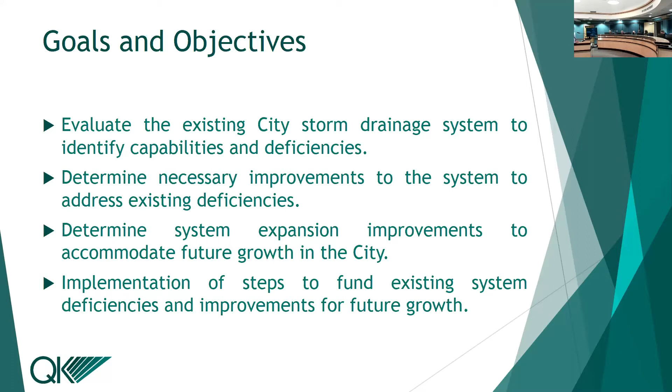Our pipelines are then designed for the intensity of storm: for residential, a 2-year storm at 0.11 inch per hour for catch basins and pipelines, and a 5-year storm for commercial and industrial areas.

The city relies on basins for storage of its stormwater. There are 2 types: retention basins, which just hold the water with no outlet, so it evaporates and percolates into the ground, which is why they're designed for a larger storm to allow for that. The detention basin, predominantly what the city uses, has an outlet designed to be pumped out within a 96-hour period, basically 4 days, pumped out to the Lemoore Canal and various irrigation ditches going through Lemoore.

Those are based on design from the master plan, your stormwater management plan, and also the National Pollutant Discharge Elimination System. That has some requirements that are multifaceted: public education about what not to dump in the storm system, temporary construction measures to reduce erosion, and also design criteria for the basins.

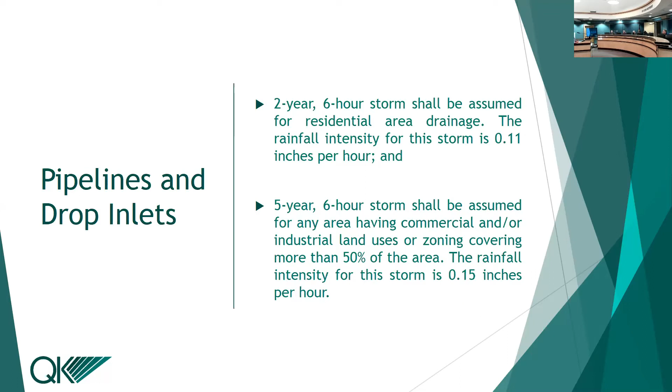So these are the design criteria we've used going forward with the previous plan and in this update to your master plan. Now let's look at your existing storm drain system.

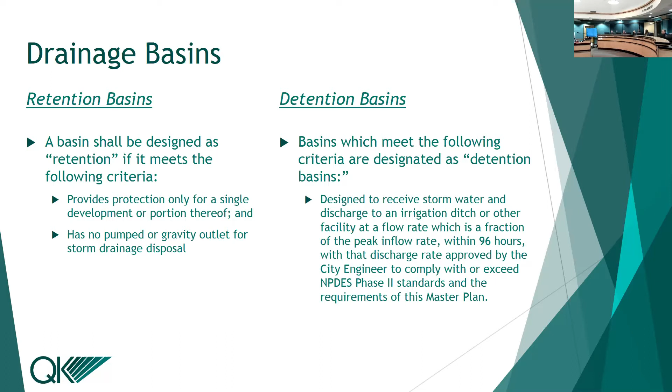The existing collection system, shown here with all the red lines as your pipelines throughout the city, serves about 5,400 acres in the city limits. Generally it works, it operates and functions well. It's maintained and operated well by staff.

The existing pipelines are shown, the basins in blue, and the black dots are your pump stations. The yellow highlighted areas, which are kind of hard to see, include some along 18th Avenue north of 198 — we'll be talking about downtown high school improvements there. There's also a bit along the north side of Highway 198 out to the West Hills College area, which we're calling the agricultural commercial improvements. And then the Hess Basin, down south of 198 along 19th, has some yellow area showing improvements to allow for drainage down to the Hess Basin.

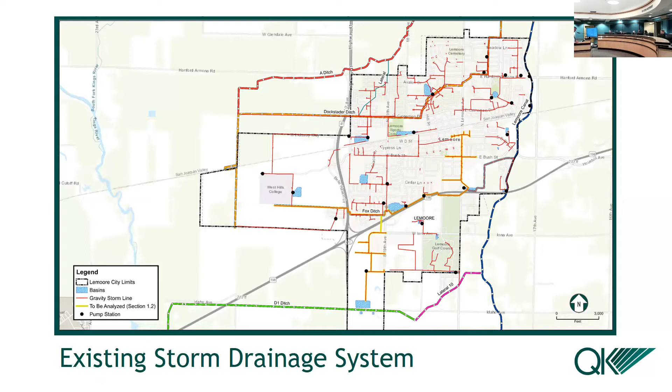Next slide is the existing storm drain lift stations within the city of Lemoore. You have 25. Two of those are pumping seepage water from the Lemoore Canal back into the canal to help mitigate groundwater along the canal and the adjacent developments. Many of the other pump stations are pumping water from the detention basins into the canal or the various ditches within the city.

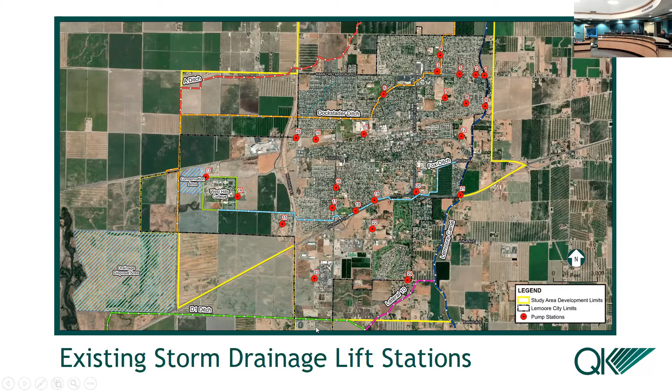These are the existing storm drain basins that the city operates at this point. The blue ones are detention basins, which are the predominant basins you have within the city to manage stormwater.

You only have a couple of retention basins, one small one down near the golf course south of Iona, and one out by West Hills College, which is really a temporary retention basin—eventually to be a detention basin. The one out by West Hills College is the larger red area. The college pumps into it, but it has no outlet at this point, but it will eventually.

Is that planned to stay there, or is it something that could be moved? Right now, the plan is for it to stay there, do some expansion, and add another pump station to pump out of that basin.

There's a blue line below there on that map—a line that the college put in with the bond, and a pumping station on both sides of that. Existing pump station on the north side, yes.

Just wondered if you considered moving something like that, to create more economic development from the college and residences around that.

That's also a well location, so when we have to purge and dump wells, we need areas for that water. There has been talk about maybe extending that out to hit the Fox ditch, but we're going to address that down the road. There is talk about it, but the reason it's there now, I believe, is to handle the well flushings from when the well came online. It's also being incorporated into some of the development there, but that's what we're looking at right now.

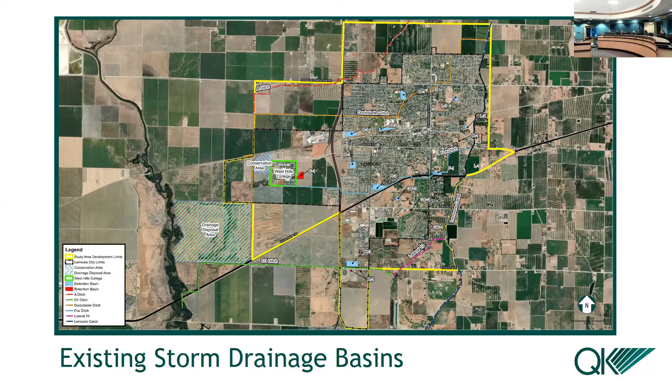The city has two large disposal areas. One is the West Hills College Conservation Area, mainly operated by West Hills College, which does accept some water from future residential developments along the north side of Bush. It's about a 55-acre site with some additional capacity, subject to negotiations with West Hills College. The biggest one is the area southwest of West Hills College, the drainage disposal area—almost 800 acres of easement that the city has for disposal of stormwater.

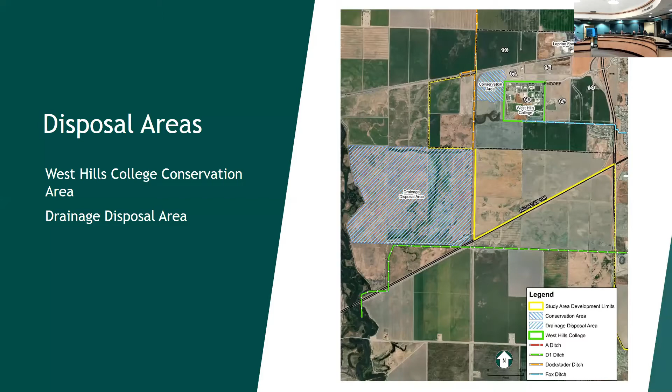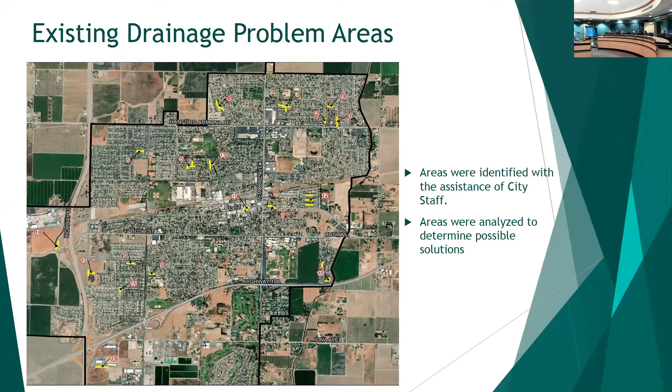So these are the improvements we were talking about for the existing drainage issues within the city of Lemoore. The downtown high school basin expansion, some additional pipelines in Lemoore Avenue in that area, and a pump station which would help the downtown D Street area, plus some expansions, and some operational connections taking off the Fox ditch and going to the Lemoore Canal.

The agricultural and commercial flooding improvements include some pipeline improvements along the Fox Ditch alignment west of 41. And then the Hess Basin drainage facilities, which are some pipeline and basin improvements, along with other Fox Ditch improvements and operational improvements to manage the stormwater.

And then also the localized ponding we looked at on that map with all the yellow areas—this is to take care of the rest of those, about $1.5 million. So the total is about $5.2 million of improvements to handle the existing deficiencies in the system.

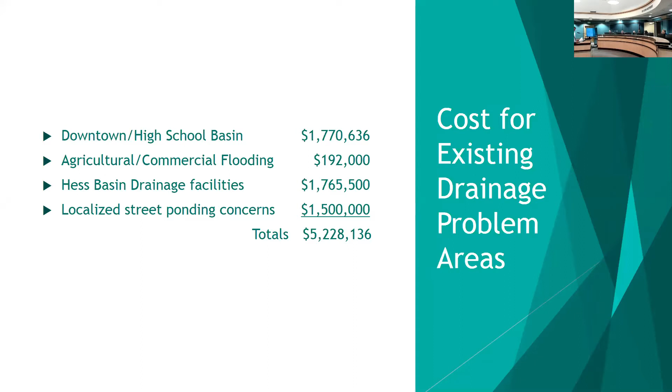The next slide shows some of the existing improvements. Here's some of the high school and downtown improvements. The orange lines are improvements for existing deficiencies, including the pump station at the basin, a transition from Fox Ditch to Lemoore Canal, some Fox Ditch improvements by West Hills College, and the area for Hess Basin.

As far as future growth, we looked at two areas. Area one is near West Hills College, west of 41, covering expansion of that existing basin, plus addition of a pump station to pump into the drainage area to the southwest of the college. So that's what that's handling.

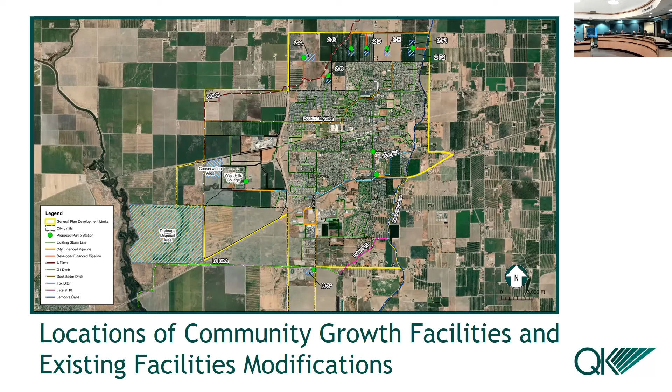Area two is north of the city limits, from the city limits to Lacey Boulevard, with sub areas 2A through 2F. 2A and 2B will go to the A ditch through detention basins and pump stations, and 2C through 2F will have detention basins pumped to discharge to the Lemoore Canal. That's the current plan. Those two areas are the primary growth areas in the city.

The cost for area one around the college is about 1.1 million. Area two, sub areas 2A and 2B which go to the A ditch, are about 2.6 million, and sub areas 2C through 2F about 3.8 million. Total is about $7.5 million for total improvements for future growth.

So what's the next step? How do we finance that? Typically growth-inducing improvements are handled through development impact fees. Our preliminary estimate shows the storm drain impact fee might be about $1,400 per single family residence and about $6,300 per acre. The next step after approval of the master plan would be an impact fee study to determine those fees. That's a quick overview of the storm drain master plan.

Next, we're going to turn this over to Carollo, unless you had a particular question right now.

Just a quick question on the last slide about the fees generated—is that the only source? We also charge for sewer and water and have impact fees for storm, sewer, and water. This would be an expansion of those since we're expanding improvements in the growth area. It would typically replace your existing impact fees with this particular one. We currently collect impact fees, and the current fees as they are today will generate about 4.1 million towards future expansion, so we'll have to look at our impact fees to fund this 100%. But the storm drain funding has to come from impact fees collected from storm drain—we can't use other impact fees to subsidize this project. So we could bond this, like we did with water. Absolutely. With that, I'm going to turn it over to Carollo.

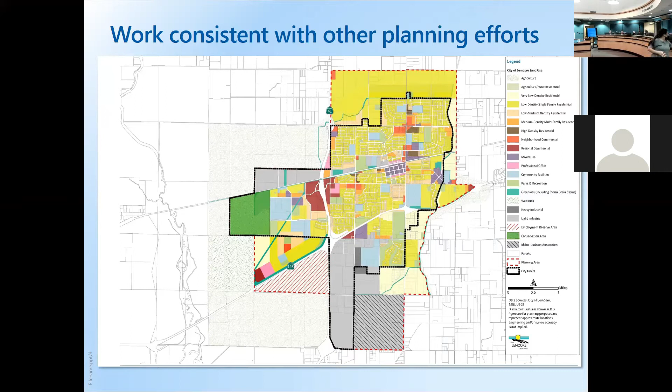So our work was consistent with other planning efforts. The basis of our master plans was, number one, the city's general plan update. We went through and documented all the information we knew based off the information provided in the general plan, as well as future known developments that have been specifically identified by the city.

This map shows areas of known near-term developments set to happen within the city. As Jeff mentioned, there are some bigger areas on the west side of town, as well as to the north of the city limits—two hotspot areas, with some infill developments considered as well.

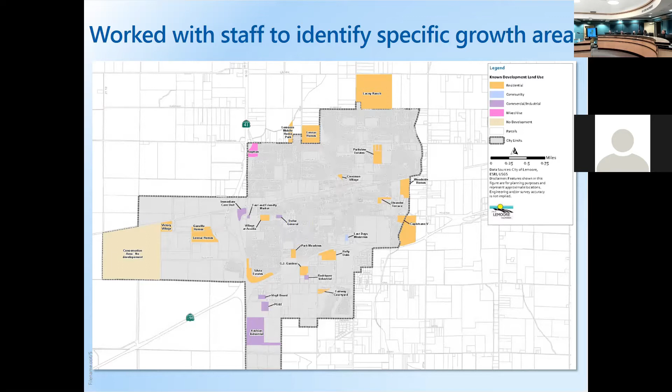The first piece I wanted to get into is the water master plan. The first thing we did was determine what the existing and future demands would be for the city. There's a bit of complication in doing that analysis, given that system demands have fluctuated in recent years, particularly associated with the 2014 drought conditions.

So we had to do a sensitivity analysis on that data and determine what we wanted to consider for the existing and future demand projections, shown here on the graphic. The purple line is the baseline average day demands, and the red line is the projected.

There are two different demand sets within the city: industrial and domestic demands. The blue line is the historical and projected industrial demands through 2040. The purple is your domestic demands, and the red line is the total demands, combining the two together. We used the dark red line in the middle of that shaded area as our projected future demand for the city.

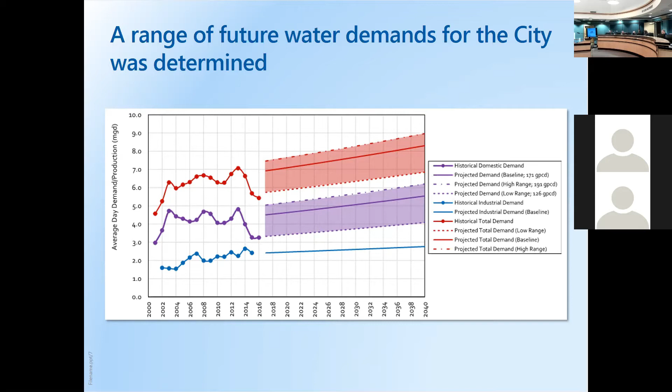Most of the drop we saw from 2014 to 2017 was state-mandated drought reductions, so there's expected to be a bit of a bounce back from those demands. When evaluating the capacity of a water distribution system, we want to make sure it's sized to handle reasonable demands we could see in the future. So we took a low-end demand projection and a high-end demand projection and picked a happy medium as our projection moving forward.

To actually evaluate the capacity of the system, we used the water system hydraulic model under different scenarios. Similar to the storm drain system, we evaluated the performance of the distribution system under current conditions, as well as projected year 2040 and build-out conditions, running it for several different demand conditions—max day demand, which is the highest demand on a summer day, and max day demand plus fire flow conditions, to make sure pipelines are adequately sized to meet fire demands throughout the distribution system.

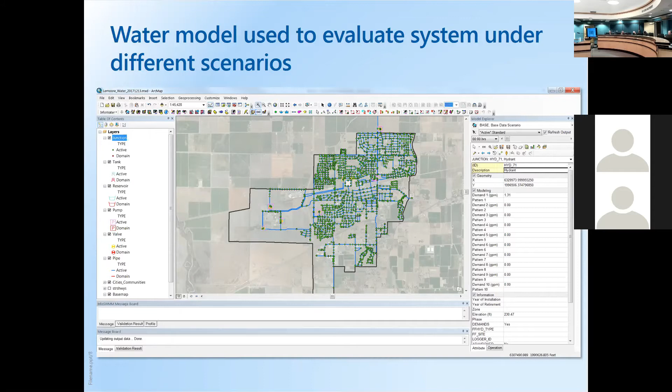Planned projects were included in the existing system evaluation, which we evaluated under max peak hour demand conditions as well as fire flow conditions. The city has done a lot of work on the supply side for the water system—a lot on the treatment plant side, installing new wells and things like that—so much of the work had been done in advance. The main driver for existing system improvements for the water system is fire flow.

So those are typically smaller water mains within residential neighborhoods that are undersized to meet the required fire flow demands. Essentially the bulk of the existing system improvements for the Lemoore water system are driven by upsizing small water mains to meet fire flow requirements.

And if you look at the next slide, we also created a water system grid through build out of the distribution system. I planned out the pipelines that would be associated with that, as well as future tanks and wells that would be associated with that growth as well.

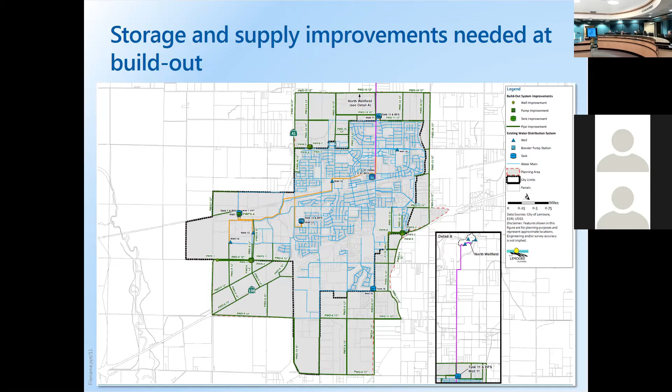So that is a brief overview of the water distribution system analysis. I will wrap it up with a summary of the capital improvement costs at the end. But at this point, I'm going to turn it over to Joaquin to discuss the wastewater collection system evaluation.

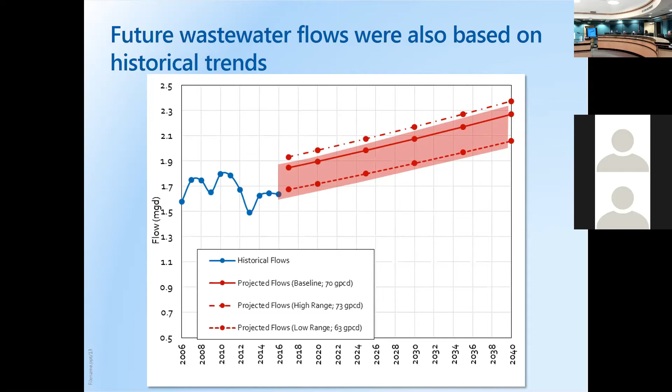Next slide, please. Next—oh, there we go, right here, okay.

So peak flows were applied to the collection system model to identify deficiencies. Once we established the future flow criteria, we were able to develop not only existing conditions within the model itself, but we developed 2040 projection flows and build-out projection flows. Within the sewer hydraulic model, we look at average dry weather flows, and then we look at peak flow conditions. Under the peak flow conditions, we really want to stress the system and determine if the collection system can handle peak flows, and if not, what mitigations would be required.

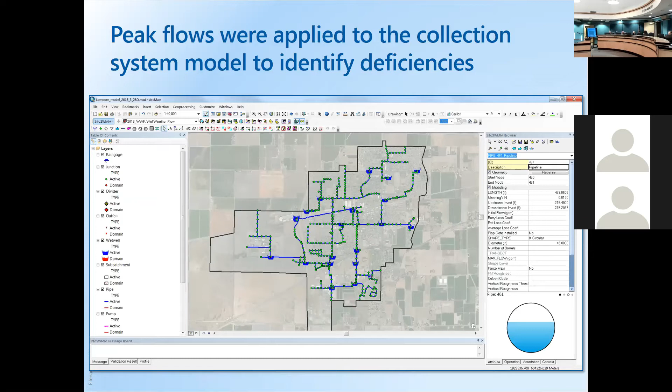One thing I want to point out with the sewer model itself is, as you see on this figure, the blue lines represent pipelines, but then you have this large area of the city where there's really no pipelines extending to. That's because we skeletonized the model, which means we only looked at pipelines 10 inches in diameter and larger. That's pretty common for master planning. If we wanted to include the whole system, it would be very time consuming, as we'd have to input inverts for every single pipeline. Really looking at the mains itself is what we want to look at.

Deficiencies under existing conditions were found system-wide. Here we have a pipeline deficiency which extends from Bush Street and Vine Street down to the wastewater treatment plant itself. That improvement recommends increasing the existing pipeline to a larger diameter. Down on the right-hand side, we have detail A.

And what that shows is an ongoing project the city has going: the abandonment of the Viera lift station, Carmel lift station, and constructing a lift station that is much larger. In addition to that, we identified the Avalon lift station, the Granary lift station, Bush Willow lift station, and Thomas lift station there as being capacity deficient. So our recommendations for those would be to increase capacity to convey peak flows under wet weather conditions.

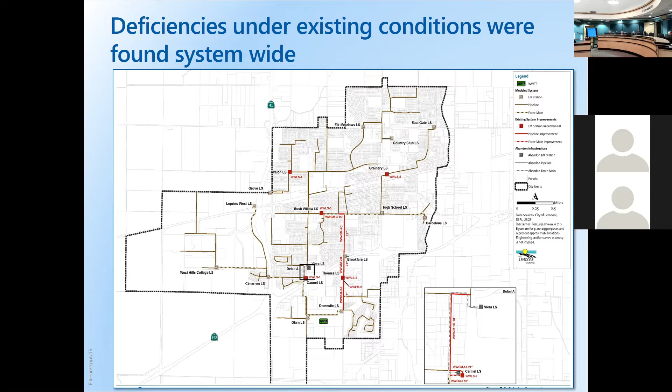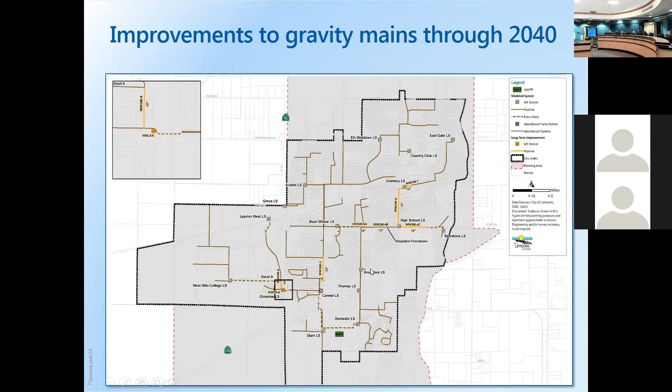So, improvements to gravity mains through 2040. As the city expands, wastewater generation increases, and under 2040 conditions, as wastewater flows increase, the existing pipe diameters in certain areas are not large enough to convey flows. So you can see here in yellow, we recommend some pipeline improvements in the east, central, and Bush Street areas, and the Cimarron lift station is recommended to be improved. These recommendations are there to assist with conveying flow and avoiding any potential sanitary sewer overflows.

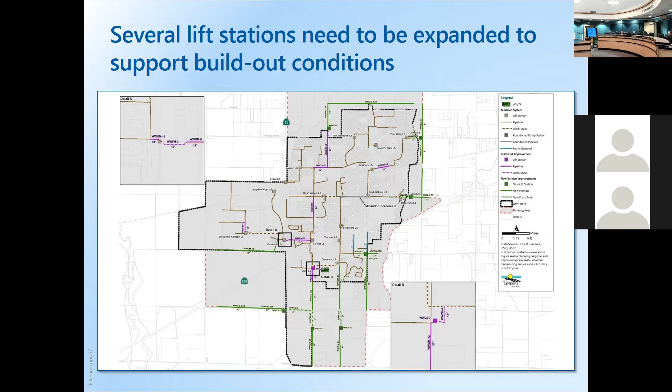The purple pipelines in this figure represent improvements under build-out conditions. This means improvements to the existing system, basically increasing the existing diameter, which conducts the wastewater collection system.

Next, I'll pass it on to John Witter, who worked on the wastewater treatment evaluation for the master plan. Thank you, Joaquin, and thanks again to council for giving us the opportunity to present tonight. First, I wanted to mention the drivers for the wastewater treatment plant evaluation. It's a little different than for the distribution and collection systems, where we look at pipeline capacity and infrastructure condition. That's important for the treatment plant too, but one of the main things that drives upgrades for the treatment process are forthcoming regulations and regulatory requirements.

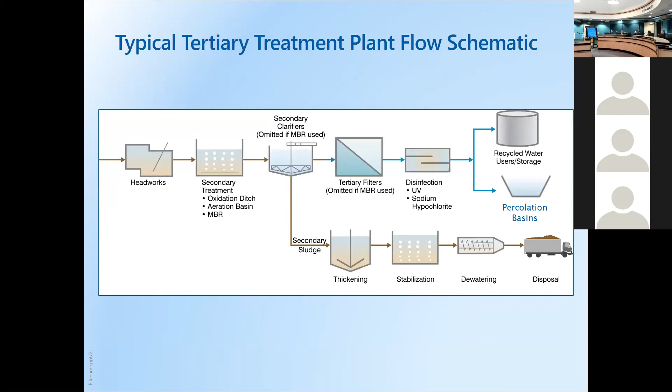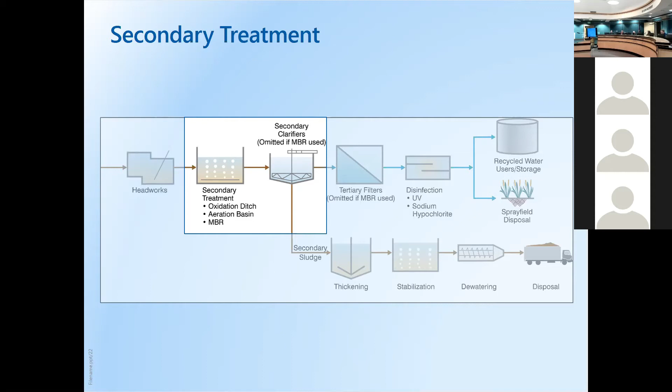On the next slide, we hone in on the secondary process, which is the biological process that is the main element we focus our design around to be able to meet the organics and solids limits that we are anticipating. So we look at what are the alternative secondary processes capable of meeting these limits.

The suspended growth alternatives are the only technology capable of meeting the strict nutrient and organics limits that are forthcoming. There are 3 different alternatives we evaluated here: the oxidation ditch, conventional activated sludge, and the membrane bioreactor, which were the 3 secondary alternatives compared for this master plan. On the next slide, you'll see the analysis we developed for these 3 alternatives.

We developed a financial analysis, which includes the capital cost for the secondary elements, as well as the annual operation and maintenance. The capital cost is for the new infrastructure for basins, pumps, and equipment required to construct the facility. The annual operation and maintenance includes things like the power to run the pumps and the labor for operations and equipment maintenance.

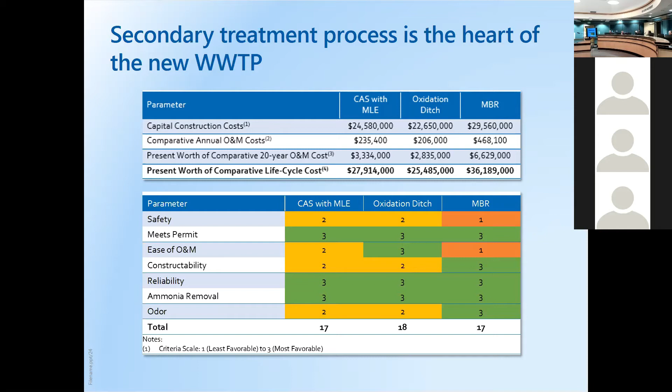On the non-financial analysis, we look at things that are not cost related. Cost is very important when determining the treatment process, but it doesn't tell the whole picture. We want to make sure the treatment process also aligns with the objectives of the city, so we look at things like ease of operation and maintenance and reliability of the process. Again, the oxidation ditch is the preferred alternative in the non-financial analysis as well.

It is an easier process to operate than the other 2, the activated sludge and the membrane bioreactor. As we transition from a land-based system to a mechanical treatment process, it's important to have a system that is easier to operate to ensure the greatest chance of success for continued operation and being able to meet discharge permits.

So the secondary process is the main biological component, but then transitioning into tertiary treatment. Tertiary treatment consists of filtration and disinfection, and tertiary treatment is not required to meet anticipated discharge requirements.

Tertiary treatment is what's included to produce recycled water. Going into this project, we understood there is a driver for analyzing a potential recycled water system, and tertiary treatment allows you to produce disinfected tertiary recycled water for unrestricted reuse.

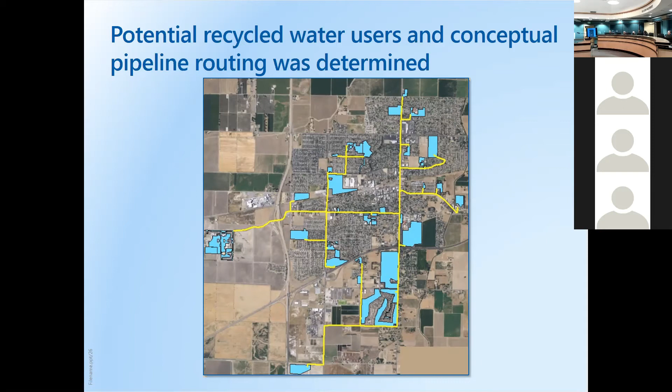Looking at the demands based on the area of recycled water uses, recycled water space, and matching that with the wastewater flows, there's certainly a justification for producing or developing a recycled water system based on the sizes of the demands and the production.

We can implement new treatment processes that can remove biological constituents within the water. But one of the main things that's important to consider with recycled water is the mineral content - minerals, think of salts and sodium, chloride, things like that. Those are inert compounds that cannot be removed biologically.

It requires a separate treatment process to physically remove these salts from the water, and they then are concentrated into a waste stream that needs to be dealt with. Comparing the effluent quality to standard guidelines, there are a couple parameters that indicate that the salinity in the effluent could potentially be detrimental to apply onto certain crops or turf grass.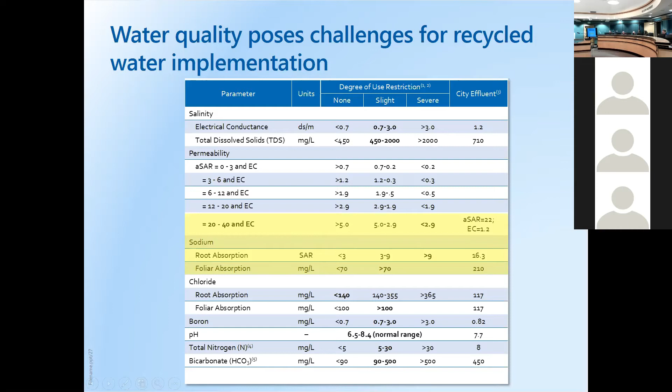One of the things we looked at for the master plan on the next slide is what are the alternatives, the range of scenarios that would be required to address this concern. So the first alternative is if we can use the recycled water on salt tolerant crops and

dilute the wastewater with potable water, we don't need to add a separate treatment process to remove the minerals, then we just need to add filtration and disinfection. That alternative is about $5.8 million of capital cost.

But if we do need to add a demineralization process, such as reverse osmosis or an RO system, to remove the salts, that's an additional treatment process that would require a capital cost and annual operation and maintenance. Then there are other considerations for dealing with the brine produced from that RO system.

Depending on the permitting ability of where that brine can go, if it can be discharged to Stone Ranch like the current wastewater is being discharged, then what we're showing here is the cost just for the 3 treatment processes, which has a cost of roughly 20 million from our cost estimate.

Then kind of the worst case scenario is if you have to implement the demineralization process and deal with the brine treatment to essentially achieve a zero liquid discharge. So you have evaporation ponds where you have to remove all the water and you're left with essentially a crystalline salt that then needs to be landfilled. That would cost roughly $65 million in capital cost.

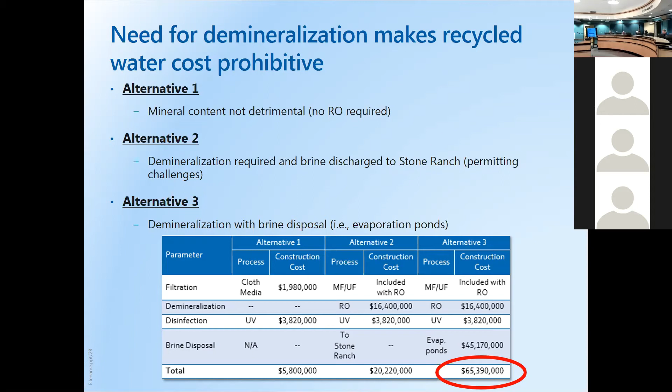The current permit requires disinfection to meet your discharge requirements, and then some solids handling, mechanical dewatering, to deal with the solids produced from the secondary process. On the next slide, we show how those processes would be implemented into the existing site.

So the two vertical north-south ponds that we're showing there - these are your four treatment ponds currently. The two that are highlighted in blue, we identified those could be converted to effluent percolation ponds.

So if you wanted to separate your effluent disposal from Leprino, you could percolate your wastewater on site through roughly the area that's highlighted in blue. And then the two east-west ponds would be decommissioned and converted to construct the new mechanical treatment processes on top of that. This is what we're showing the footprint would be for the new oxidation ditch and treatment facilities.

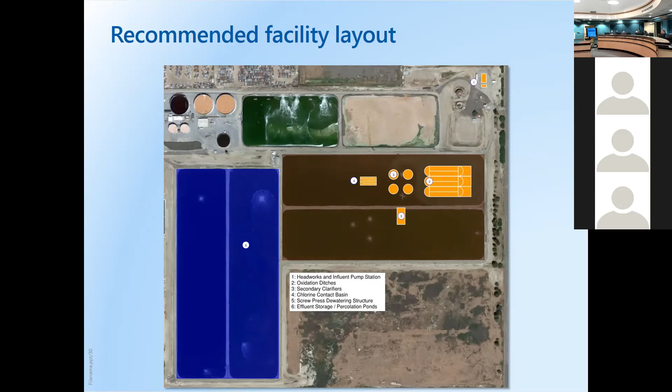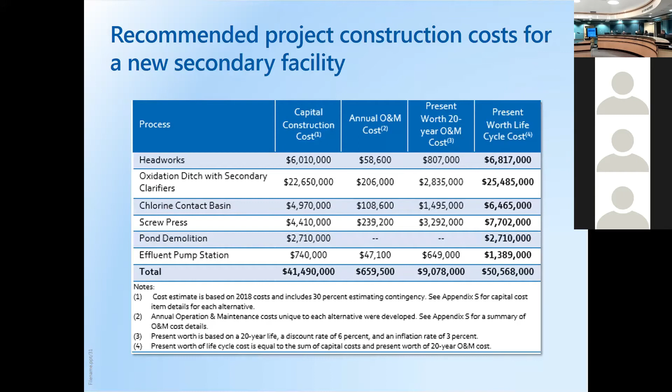On the next slide, we show the recommended project costs for all treatment elements. I mentioned the secondary treatment process, which is the main component, but there's other components on top of that: the headworks, which removes the large debris and rags and things like that, and the screw press, which is the mechanical dewatering.

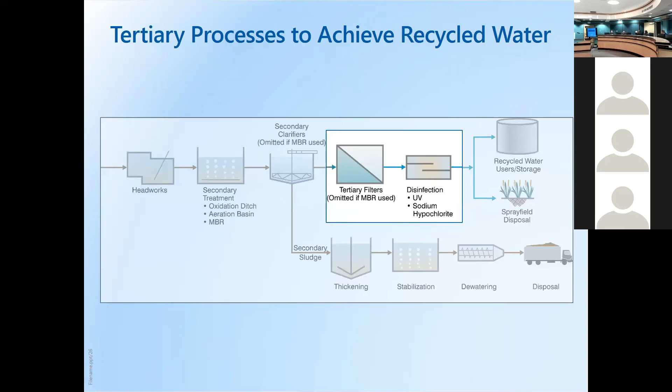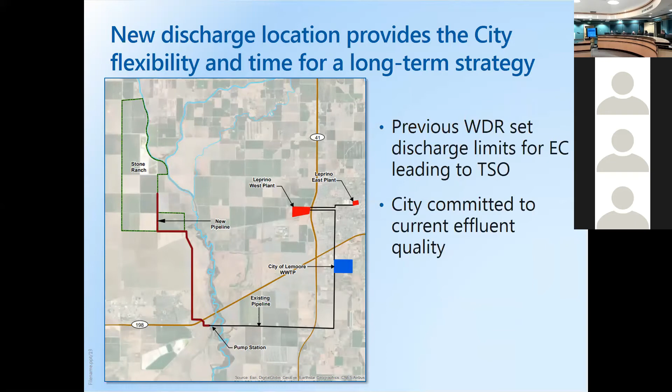And some site infrastructure that's needed to support the conversion to the new treatment plant, so the pond demolition and pump station. We're showing a capital construction cost for the recommended project at about $41 million, with annual O&M anticipated to be between $600,000 and $700,000, for a 20-year life cycle cost of around $51 million.

Next, I'll hand it back to Ryan to summarize the capital improvement plan for all three elements that we evaluated.

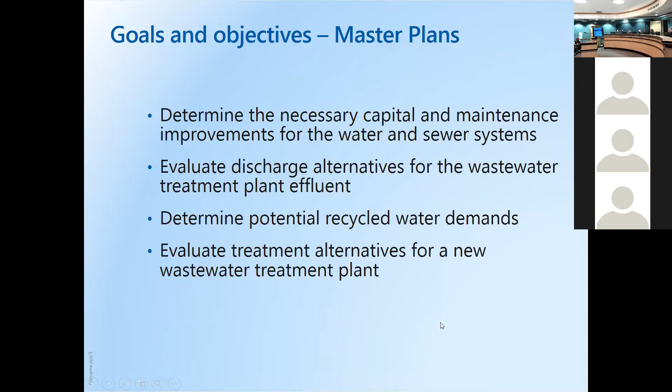Yeah, there's just 3 short slides at the end, if you could find those. Let's go through these real quick because I know we're going a bit long here. Go to the bottom, just go to the very end.

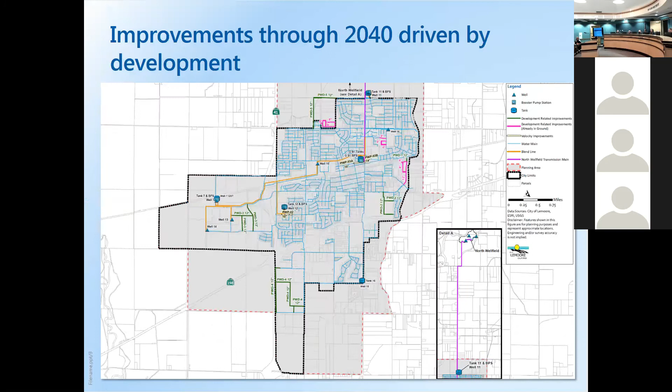Now, those are a mixture of existing user costs plus impact costs that would be borne by the developer through impact fees.

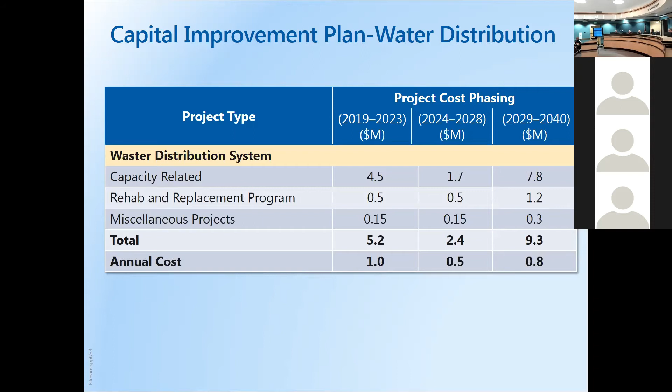Next slide. On the collection system side, we have a little bit higher costs initially, just due to the number of improvements, the large trunk sewer improvement that Joaquin had mentioned. So there's $12.8 million there in phase 1, 3.2 in phase 2, and post 2029, there's $13.1 million.

Again, those are a mixture of existing and future user costs. So that would be a combination of existing ratepayers plus costs that would be borne by the developers.

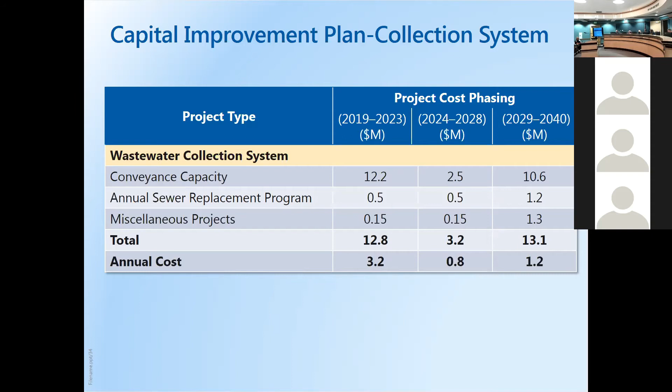Next slide. And then John hit on this last one quite a bit in terms of the cost for the treatment plant. So we have a targeted initial phase for the treatment plant design in the 2024 to 2028 timeframe, with construction of the actual treatment plant in the 2029 to 2040 scenario. So there's about $50 million set aside for that.

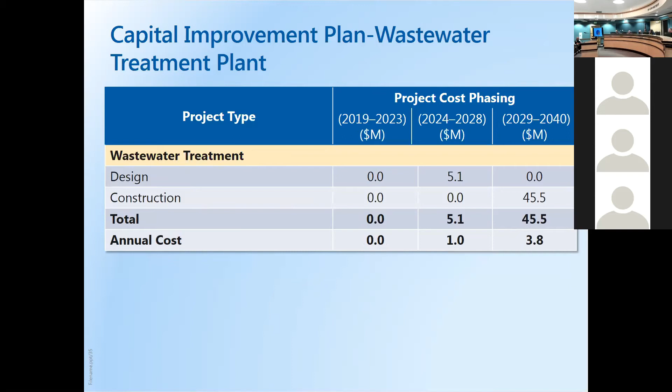I think that takes us to the end of our presentation. Again, thank you for the time. And if you have any questions, we'll be happy to field them now.

Sorry for the length of that. We're trying to fly through as much of that as we could, but if you have any questions, we're available for that. Next steps would be to bring these back to you for consideration and approval with the appropriate environmental document to go with it, and then right after that would be going into an impact fee study to analyze the impact fees required to support these improvements.

Just a couple questions. You had mentioned during the presentation you use models, or a model. Yes. How confident are you in those models and in projecting this information?

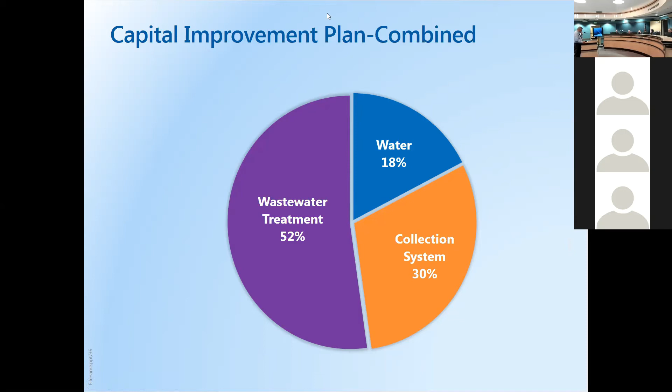Yeah, I can field that question. As part of the water model and sewer model development, we actually did an extensive calibration process. For the water system, we went through and collected SCADA data for high demand periods, back in, I think it was 2018-ish when we did that. We also deployed field data recorders called pressure loggers out in the system to record system pressures within the distribution system. So our modeling process was, number one, to build the model, allocate demands, and then calibrate it against the data we collected. So in terms of the water system, we have a good representation of what's in the ground now.

With regards to the projections, those were all based off of information that we gleaned from your general plan. So the future demand projections are only as good as the general plan itself, that was the best planning document we had to fall back on for projecting demand. But in terms of understanding current demands, our models are solid.

On the sewer side, we took a similar approach. We contracted with a temporary flow monitoring sub-consultant to deploy flow meters throughout the collection system, about 15 of those, collecting flows within specific pipes, and we calibrated our model against that data. So we have good confidence that our model represents what's happening in the existing system. The future system projections are again only as good as the planning documents used to develop those future flows.

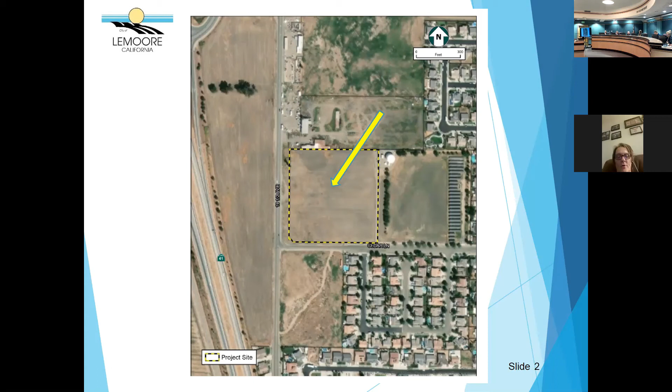And so this site is being proposed to be changed to allow offices here instead. And then the site would be available for sale from the city to a builder. The Planning Commission reviewed this at a public hearing and recommended approval.

So you can see on the zoning map here, the left map shows, oh sorry, okay no, that's right, I'm sorry, I'm really looking at the wrong site. The left map shows the existing zoning, and then the right map shows what it would be if the project was approved. So you'd see the one site changing from the green to the kind of pink color, which is the office designation color.

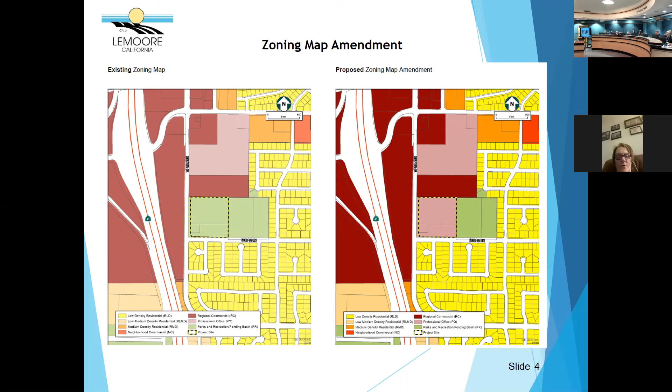So there's no development project proposed on this site, no specific development project. So this is just a reminder of the current city site plan review process. Any project that has a development of over 20,000 square feet of building space would be a major site plan review, and that would go to the Planning Commission for their review. Anything less than 20,000 square feet is considered minor site plan review, and it's reviewed at the staff level only.

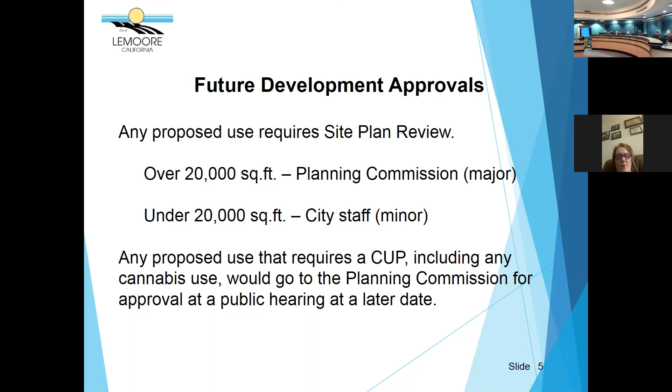So our recommendation is that you open a public hearing to accept testimony, and then our recommendation would be to approve the resolution for the general plan amendment and the ordinance for the zoning map amendment.

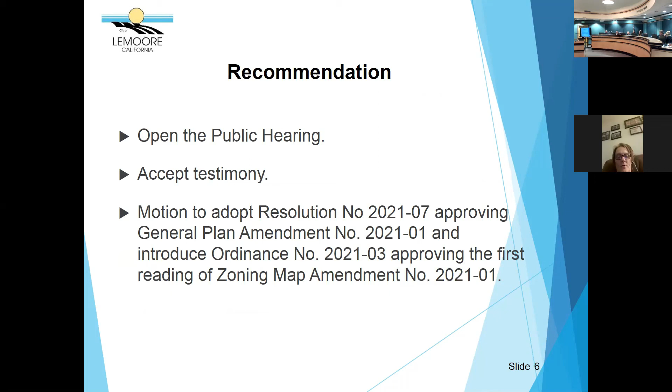Okay, I'm done. Do you have any questions? Anybody on council have any questions?

What, if somebody were to come in there either with 20,000 square feet and above or below, what kind of street improvements would be required of them? They need to build out the street to the full width along the frontage of the site.

So on both sides? It looks to me like there's one on Cedar and then also on 19th and a half, right? Is that the street? Cedar's there, well Cedar stops short, so curb, gutter, sidewalk would be extended out to 19th and a half.

If there's any place along the frontage of the site that does not have curb, gutter and sidewalk, it would be built with the development. Okay, so that's a standard for any site in the city.

But abutting 19th and a half, the west side of the site - what happens on the west side of the street would not be required, because the standard policy of the city is that the developer builds adjacent to their frontage. So if you're on one side of the street and both sides are not fully developed, you build your side, and then when the other developer on the other side of the street builds, they build their side.

And would they have to tie the sidewalk in all the way up 19th and a half, or no? Usually you only build right along your frontage. If there's an opportunity to make a connection, we're always looking for that, but sometimes it's hard. You have to look at when you're requiring the developer to build more than his fair share.